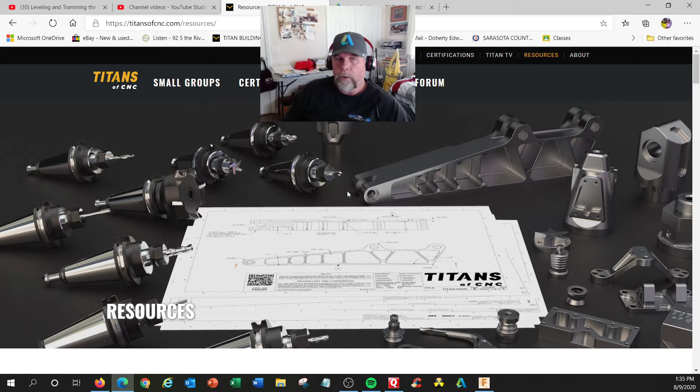So now we're in Fusion, and I got my motorcycle triple tree here. And this is my Fusion account, I got a little picture of me up there. So say I did this thing, and I don't know if this works or not. Can I send it to somebody or my instructor to see if it's good?

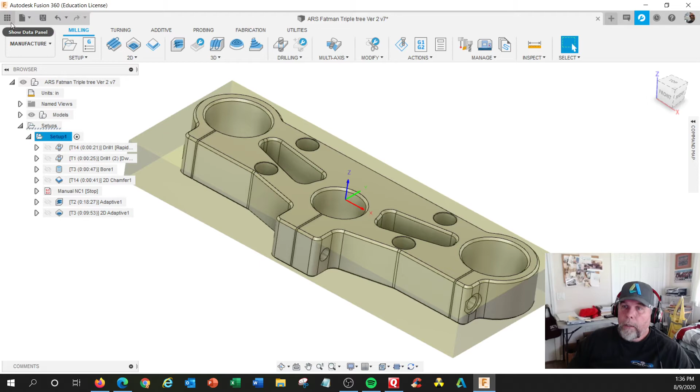The easiest way to do this is called the data panel. This is where all your stuff is stored. It's like a little Internet Explorer, I guess. So right here I'm working on ARS Fatman Triple Tree version 2, which is this one right here. If I right click in here, I can click this thing called Share Public Link. Once I click that, this pops up.

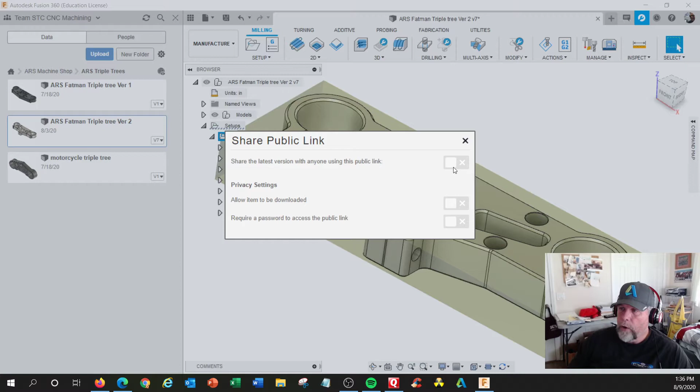Now, I have a choice here: share the latest version, click that, and it creates a URL, and I can send that to somebody and allow the item to be downloaded, which means they can download it in their Fusion and look at it. They could run it just like you run it. So I would copy that and send it by email or whichever way you're doing it.

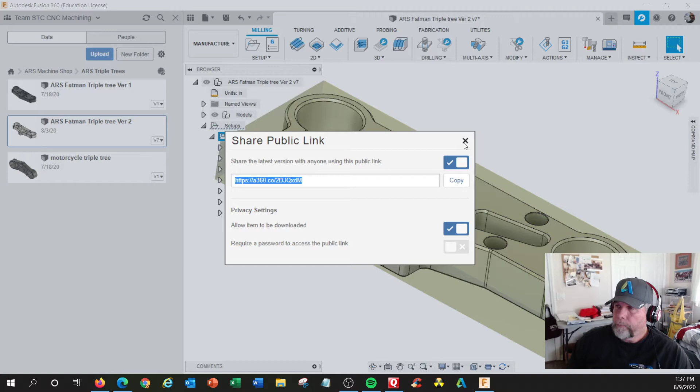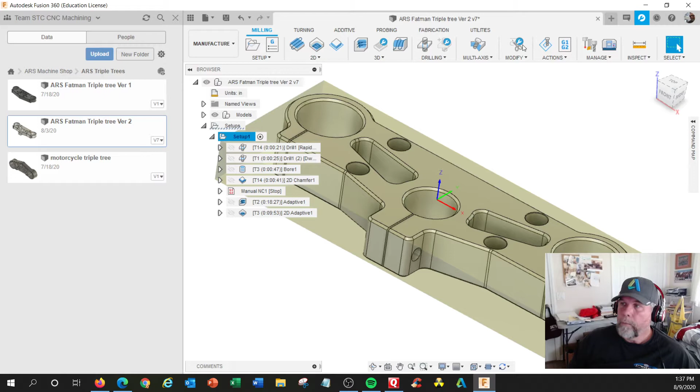So if I was in my Google account, this is my Google thing right here. So I get into my Gmail and I go and send it. Compose. I'm going to send it to my teacher, CNC dude. My triple tree bank. Let's just paste there. Send. Done. Okay. Close this file out. Don't save. I'm going to even log out.

I got 2 Autodesk accounts because I'm an instructor. You really can't have 2, but all right. So I'm going to go in with my teacher account. Alright, so I'm in my teacher account.

Let me go check my Gmail here and see what I get. This is my Google Classroom, but I got to go check my mail, see what I got there. Oh, my triple tree. Alright, right there. Click on the link.

It pulls it up in the Fusion Cloud. And you can actually send files this way to just show people what you worked on without them playing with it. So you can actually rotate this around and stuff. This is pretty neat, and there's a lot of other functions here.

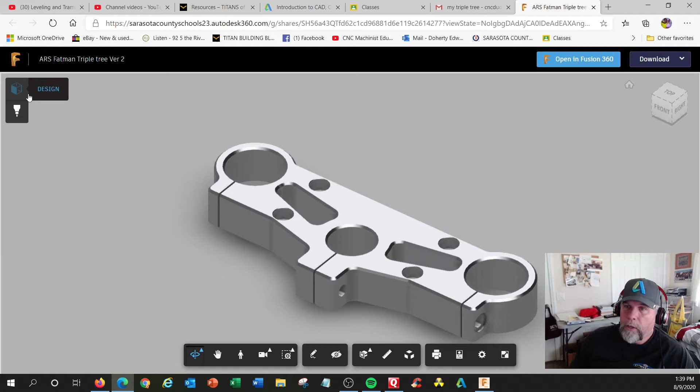It actually says CAM. I think it'll actually do some of the toolpath in here, but I'm not going to get deep into that part. This is stuff you can play with. Personally, I want to run it in my Fusion. And I can download it also in these other formats. Of course, you don't get the CAM side when you do this. You only get the design side.

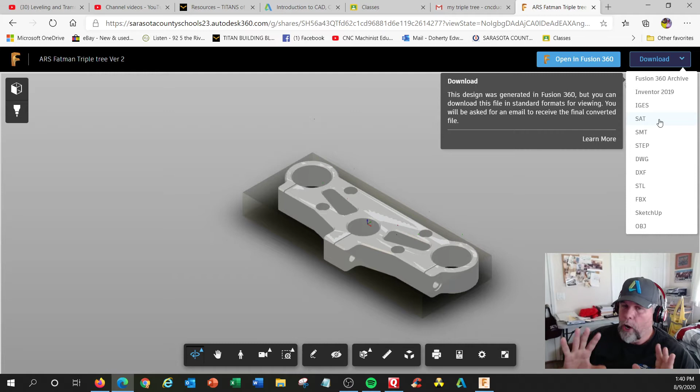So if you were a Mastercam user and you wanted to collaborate with somebody that was using Fusion, you would want to download it in one of these, like Inventor or IGES or STEP. Those would be the CAD section. You would not get the CAM. But here I'm going to say open in Fusion 360.

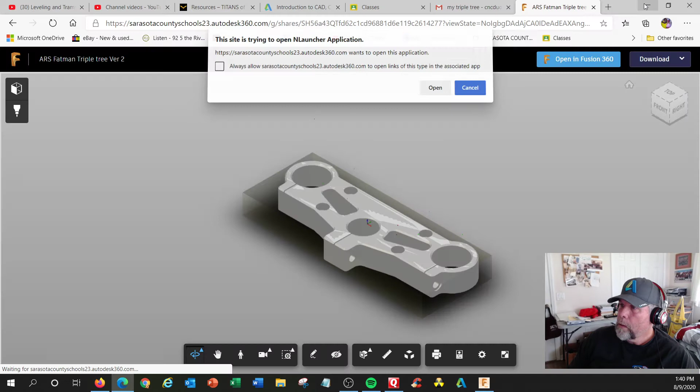And actually, I don't think I needed to actually have Fusion up. Continue with backgrounds. And wait a couple seconds. Oh, open. Okay, press more buttons. Okay, we're getting there. It says right here, oh, you can't see it. Opening document. There it is.

So somebody sent me their file. This is not in my folders up here. So I probably need to go into my single user area. Now they just started using Teams. Everybody's going to be on Teams now. So I understand single user is going to be going away. So you want to be a team. You can be a team of one.

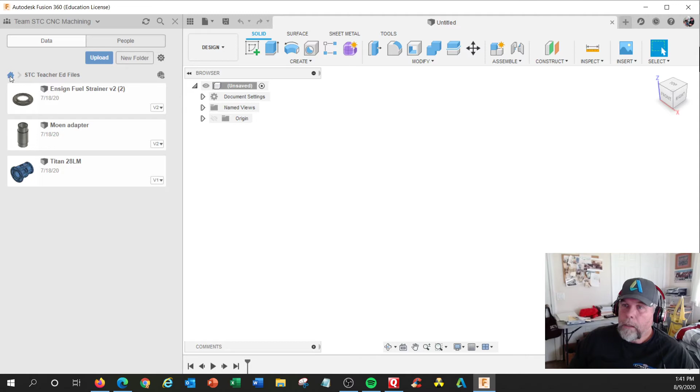So as far as organizing, I'm going to say teacher ed files. And I can save it in this area. All right. Where did that go? Did I have to go back here? Okay, so I have it in here. I'm putting it in this teacher ed file or wherever you want to do it.

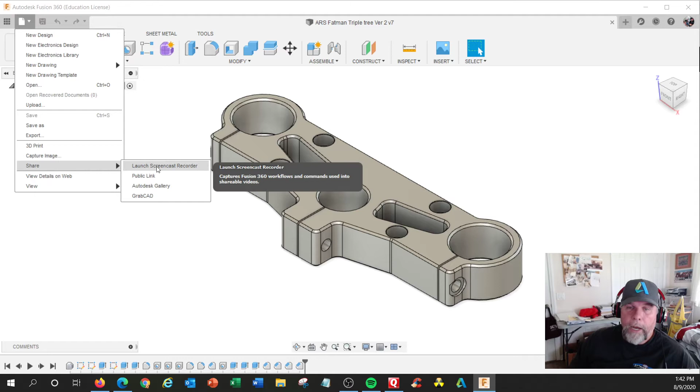But me as an instructor, I can turn on something called Screencast Recorder. It's right here. Launch Screencast Recorder. And this little thing pops up. And stop. Shouldn't have any timer on that. Let me try this again.

Share, Screencast Recorder. And right here, I press the red button. It's now recording me. It doesn't have this screen because I'm using OBS, but it's recording all of this right now. So I can have this up here, or not even on the screen. You can set up your microphone here, or hit the more button.

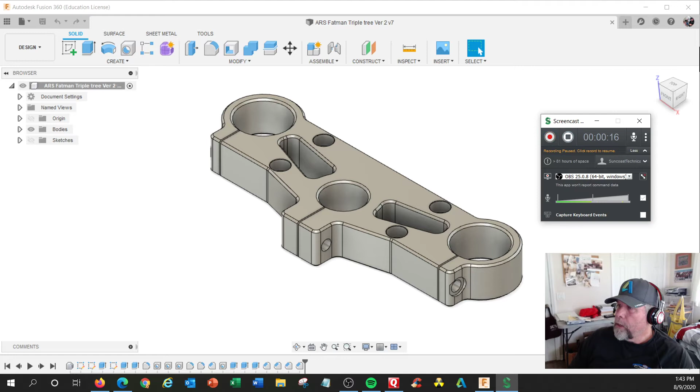So right now it says what app is it commanding right now? Capture keyboard events, microphone. So I'm still recording, and now I can hit record again. Now it's recording, the timer's running. And I could look at this project and say, okay, I like your design. I don't know much about motorcycles, but I'm a machinist. So as a machinist, I would say it looks machinable.

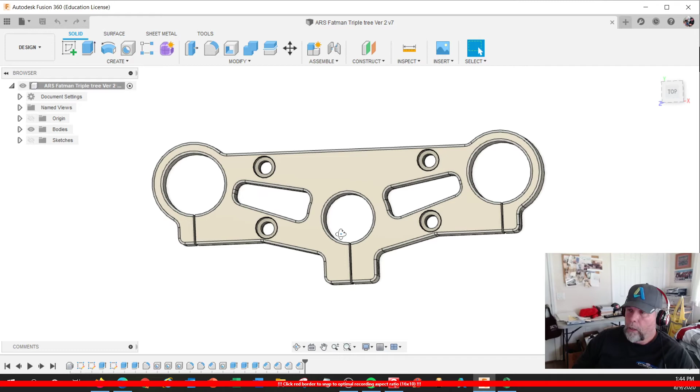It looks like we have small enough radiuses in here for the tools; we don't want to machine square corners. It's unachievable. The challenge is going to be doing these little slots right here. You could not get a tool small enough to go in here to do that. We might have to do something called a slitting saw, which means we might have to put it at this position right here. I'm going to hit the bottom.

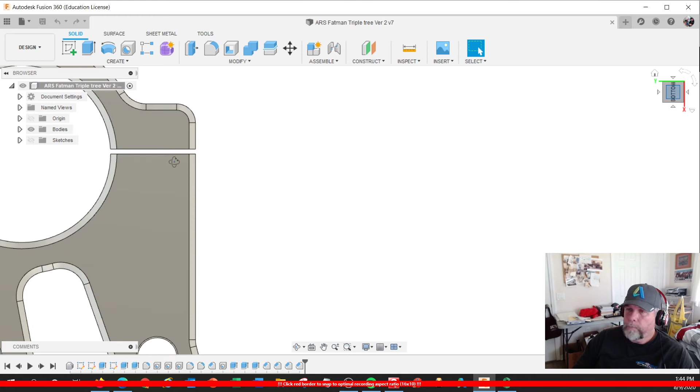And we have to do these holes anyway. So I think that's going to be the plan on this. I think we machine the outside body, and we're going to have to position this up this way. And if we have that on that mounted plate, that might be a good way to do that, if you're mounting this on the plate through these through holes. So I'm going to double click this to get this in the middle. So that'd be a good plan on that one.

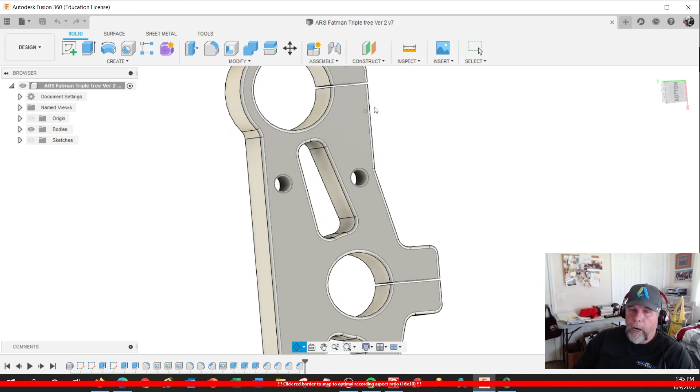So this would be a good way to collaborate. I have a design, I got it to the first step, but I'm not sure how to do this part. Or maybe we need to redesign it for manufacturing purposes. But I think from this point of view, other than that side, that should work, if we use a slitting saw, which is like a very narrow, rigid saw, and cut in sideways at the proper depth, and we just have to figure out how to get our coordinates.

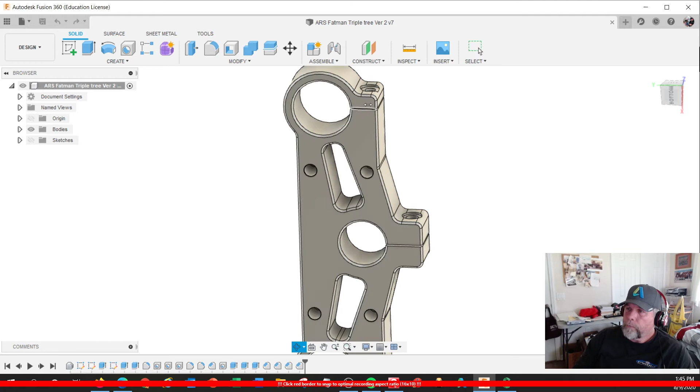So if I go back to the first view, I'm going to hit the home button. That's like the isometric view, and this is top view. And Z is facing up. CNC machine, Z is facing up on a vertical machine like the Syil or the Tormach or the Haas.

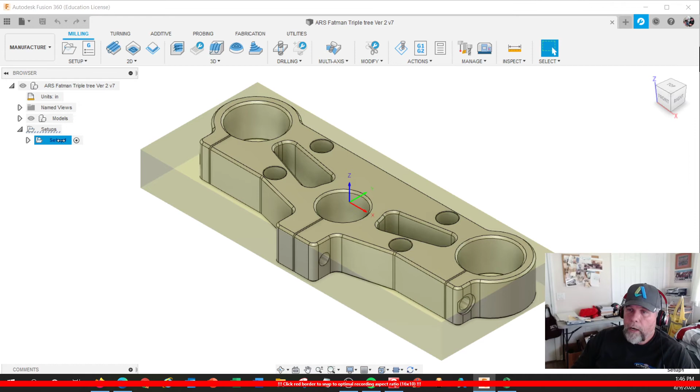But I said the design looks good. Let me look at the manufacturing point. I'm going to actually just run the simulation real quick, and I can go step at a time. That's step 1, step 2. So I'm kind of jumping ahead quickly. I might even just go right to the end, right? What do we got there? Oh, it looks good. Looks like we didn't get to the finishing though.

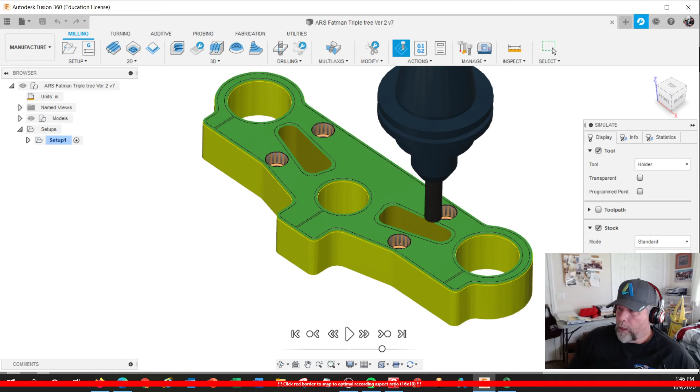Okay, but this is stuff you can do as far as the power of products like this, where Autodesk has it all built in. So I can take that screencast right up here and hit stop, and it pulls up this thing, right? And this says this is all my voice recordings, and I can say discard, edit, or save and upload. Now I never edit these things, I just save and upload.

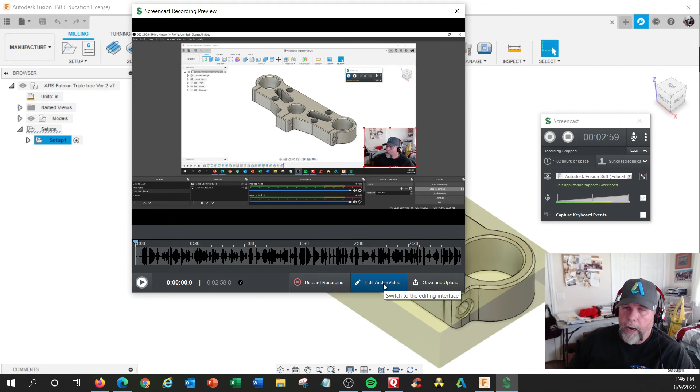So if I hit save and upload, I got to give it a name. CNC Dude Screencast Demo. And only people with this link, only people that I choose, or anyone. I'm going to say anyone, so it'll be on the Autodesk forum. How I use Screencast. And I also use it for lectures, so I could do a demonstration and it's recorded.

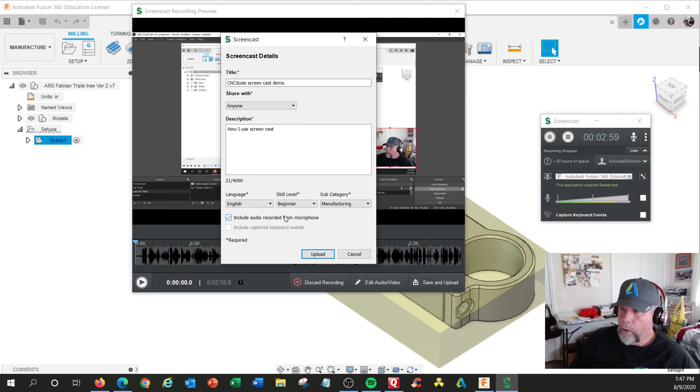And it could just stay on the Screencast library, or I can upload it as an MP4 file. It actually becomes an MP4 file. You got to pick a category. I'm always manufacturing. Include audio. So upload. So now it's uploading. I can start another recording up here. And down here, this will turn green. It's uploading. It says right here 11%.

But if I click on this, I can actually copy the link that it's going to be associated to. I can send it back before it finishes uploading. So if I email back and say, hey, I got your file. Looks pretty good. Why don't you review what I thought about the second operation? All right.

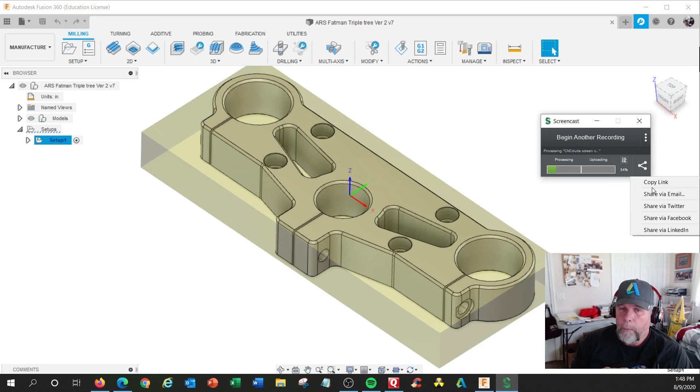So let me go back into this thing here. You hit the 3 dots, and it says Manage Screencasts. All right. So if you do that, you end up in... you gotta go into your Autodesk account. And these are all my screencasts, my dashboard right here. So these are all reviews I've done. Like these are student reviews.

They sent me a project, I reviewed the project, I send back the screencast, and I send back the URL. Eventually I'll probably clean this out. Like I had a problem with the new tool library, and this one I sent on the forum. So this is where they're all stored.

So if I click this one and say download screencast video, download as MP4, you can put it on your YouTube channel as a permanent video. So if you're teaching it, collaborating, in my class the better ones are going to be assigned to my channel to be helpful content, and maybe even build some lectures and tests around that. It's really unlimited how far I can go with this.

I'm sorry this video was a little bit longer. Oh, right up here, right down here came a little file. You missed it. It's on my dual screen that says my screencast is uploaded. So it took care of everything.

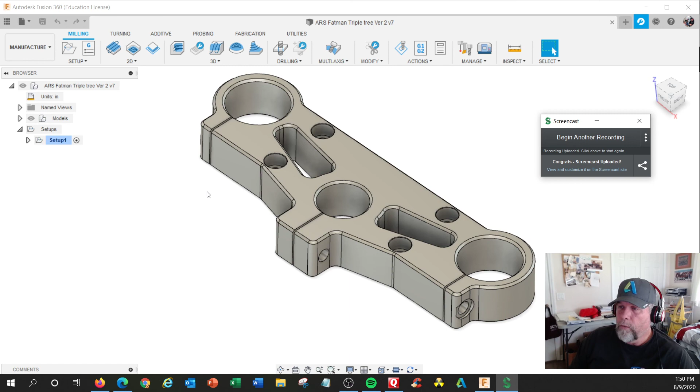So very good stuff out here, and I hope I can finish this thing soon. I've been working on other stuff, but I think I'm pretty close. I got to do my finishing profile and stuff like that, and I have to think about how to do that operation. But I think what I'm going to do is make the bottom plate, because this is a good demonstration of how to hold something not in a vise.

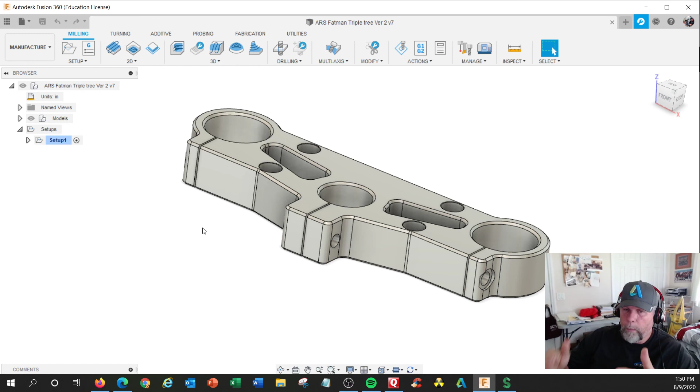You could do this as a vise job, only you need the material to be oversized and thick, and then when you flip it over, you got to figure out a way to hold this because now it's irregular shaped. We can get into talks about soft jaws.

Okay. Anyway, this is part 2 of how I use screencasts, and I hope Naomi and everybody else out there finds this helpful. And thanks a lot.